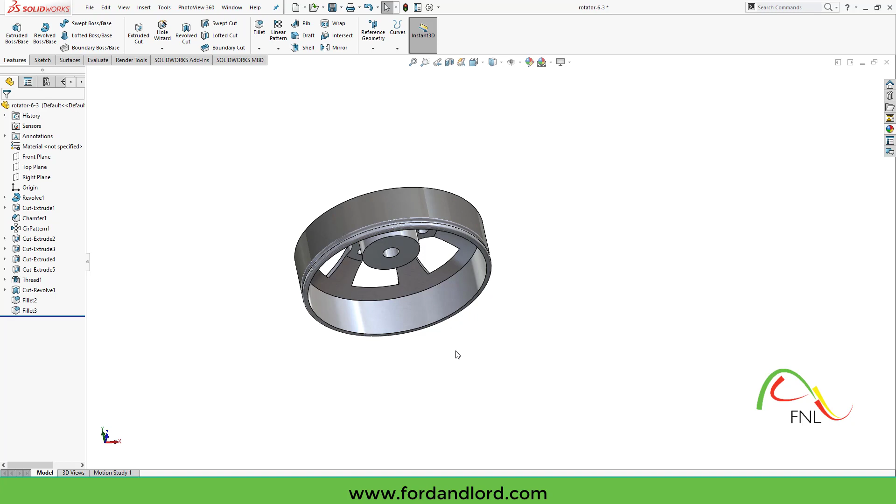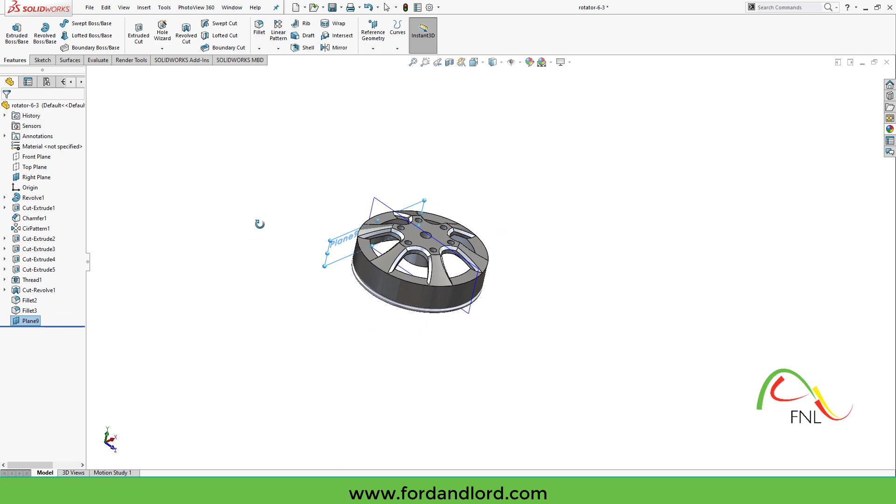So, right plane, right mouse click and show, and go to reference geometry. We are creating a new plane, and I will click on this inner surface and click OK. So we have created a new plane called plane 9.

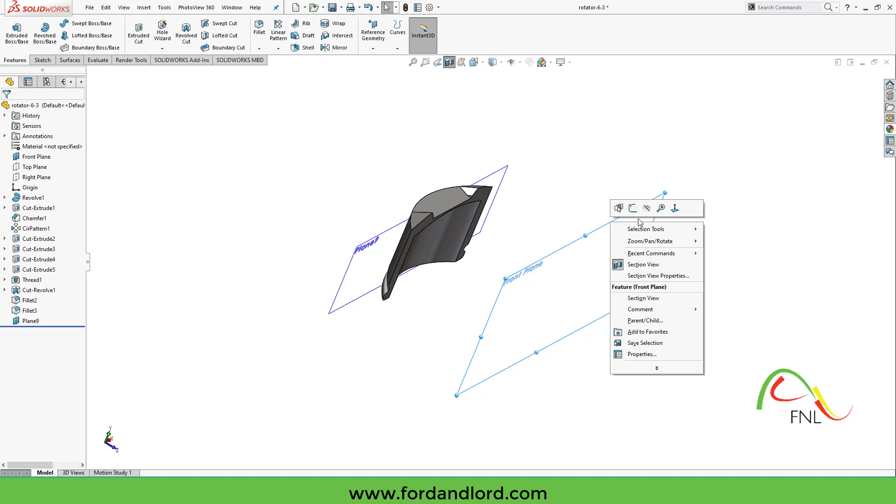Go to front plane, show, and create a section and click OK. So I will hide this plane and I will also hide this plane. Control 1 to see the inner side of this section view that we have created, and select plane, the newly created plane, which is plane 9 in our case, and go to sketch.

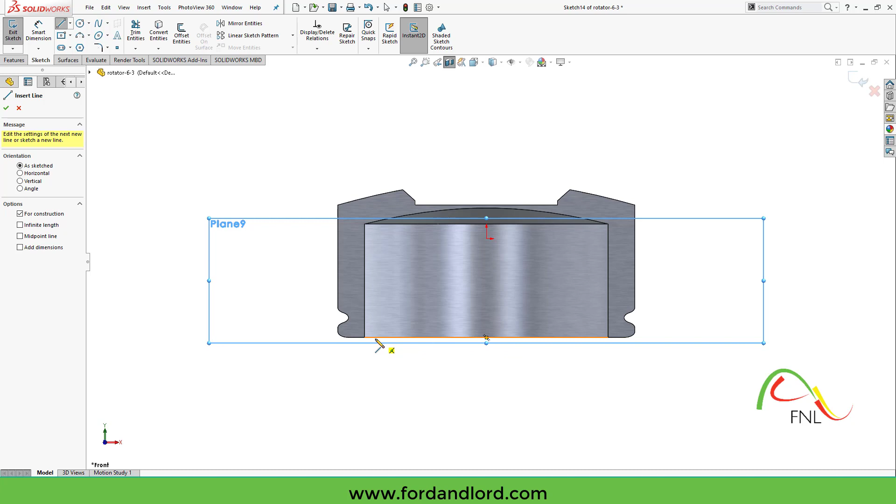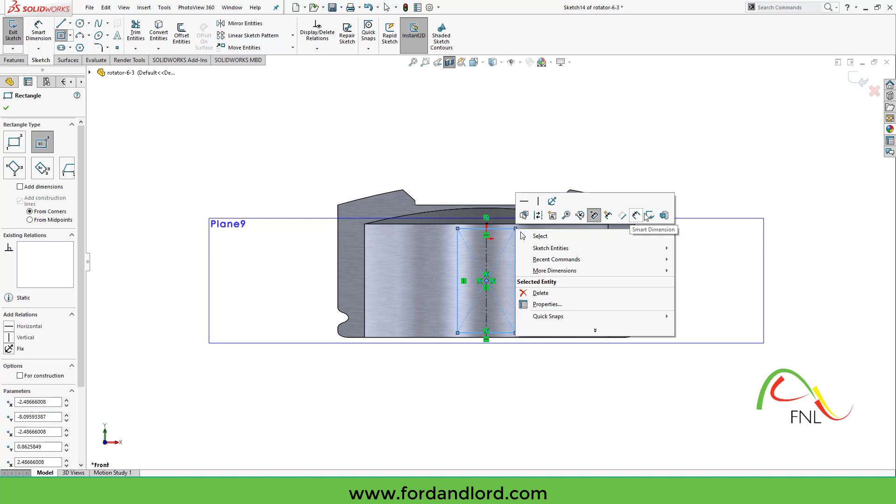Line, center line, and I want to create a center line from the middle of this surface. Click and click. Exit by pressing escape key, and I want to create a center rectangle from the middle of this newly created line. Click and drag outside. Click again, right mouse click, smart dimensions. This line has to be 9 millimeters and this line has to be 6 millimeters.

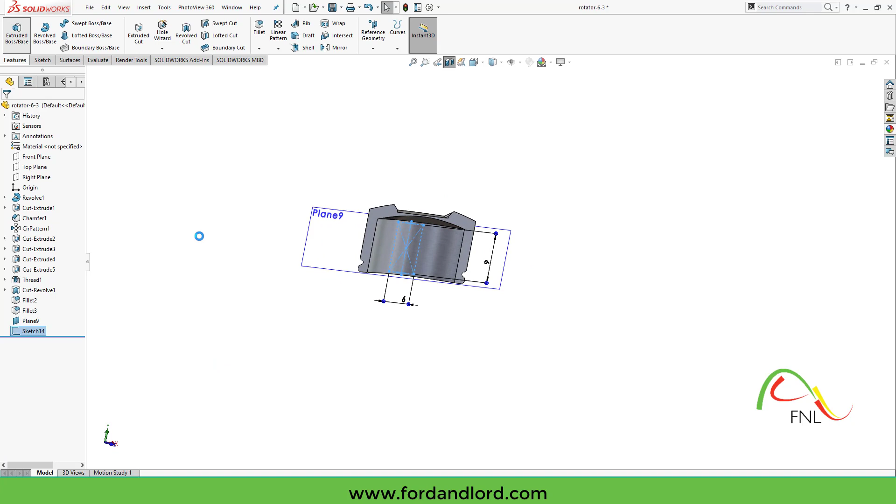OK, and click OK. So we have created a sketch, and select sketch 14. This is sketch 14, and go to features, extruded boss/base, and we want to extrude it up to 2 millimeters. Click OK and exit out of the section view.

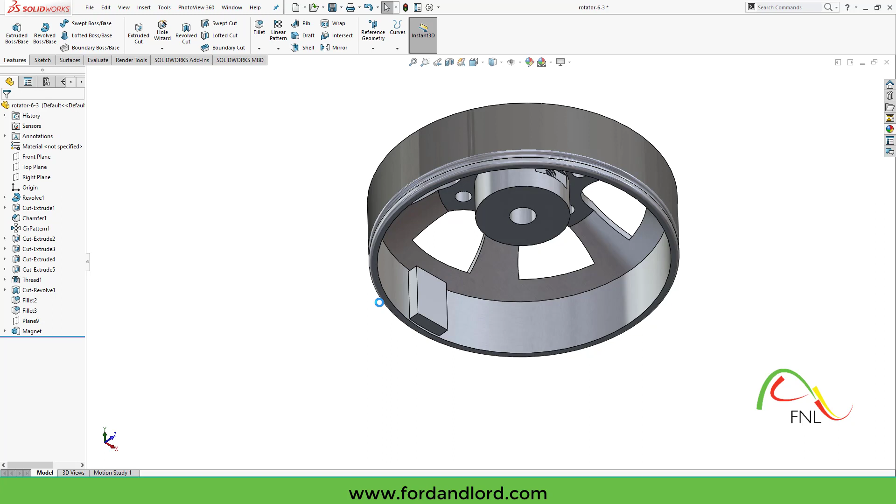Right mouse click on plane 9 and hide. So we have created a magnet along the inner surface of the rotor, and this magnet is called boss extrude 4. I want to change this name, so left click, wait for a few seconds and left click again, and rename it magnet. So this extruded feature is now called magnet.

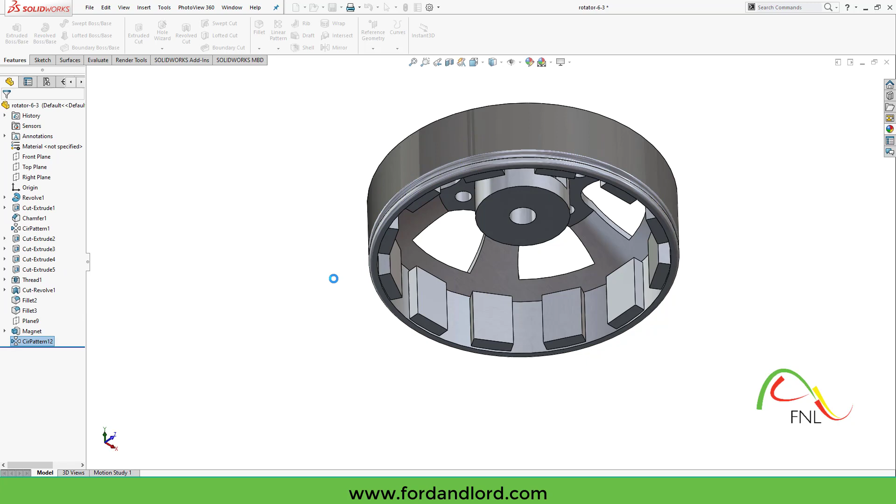Select this object, go to linear pattern, drop down to circular pattern, and click on any circular surface, and we are making 12 copies of it, with a 360-degree rotation. Click OK, and the 12 magnets have been created along the inner surface of the rotor.

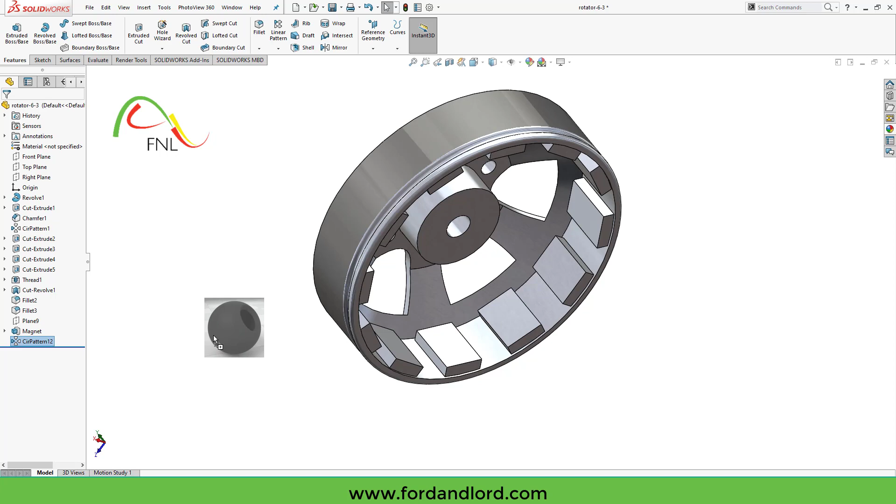We'll change the appearance, applying metal, iron, and black material on these surfaces, and we want to apply the same material to the original one.

Okay, so this is for today, and I'll see you in the next lesson.